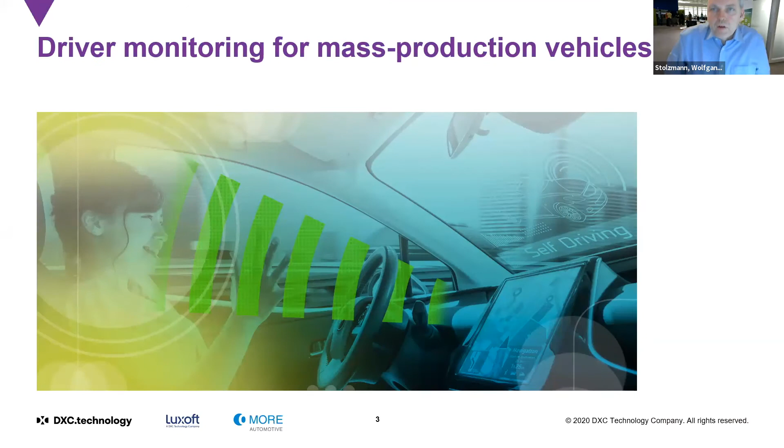Okay, let's start with driver monitoring systems for mass production vehicles, and as I announced, with the paradoxon that driver monitoring is an enabler for autonomous driving. I'm completely convinced that at least for the next 10 years, it can be assumed that a driver will still be needed to take over control in situations where a car is driving more or less autonomously, because if you imagine that we have one bad accident every 10 million kilometers, and if you drive with an average speed of 100 kilometers an hour, then you have one bad accident within 100,000 hours. And developing systems that can deal with probabilities of 1 out of 100,000 hours is very complicated.

And this is why we often think that we already have cars that are driving autonomously. They are driving themselves, but they cannot take over the responsibility for all seldom and strange situations. And with this, you need a driver who is able to take over responsibility in situations the system cannot deal with. We call this conditionally automated driving or level 3 automatization. And to ensure that the driver is not sleeping or completely out of the loop, we need a driver observation that ensures that the driver can take over the responsibility. And this must be done with driver monitoring systems, because driver behavior cannot be observed otherwise, because the driver is driving hands-free and the car is driving itself. So we need a driver camera.

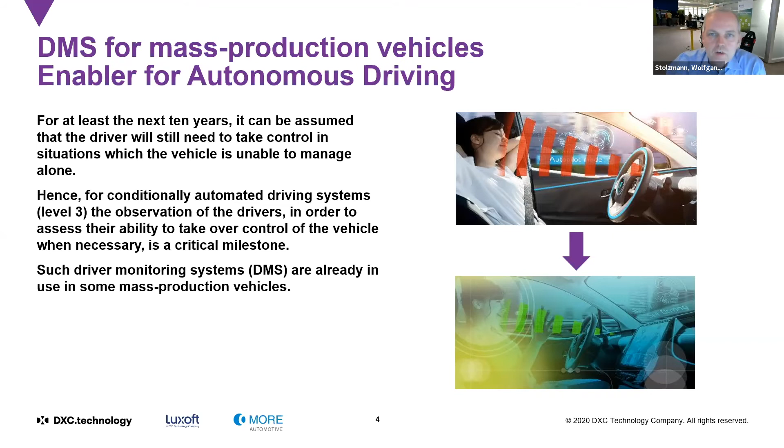So this was an enabler for mass production cars 5 to 10 years ago. But up to now, we have a lot of other interesting applications that can be seen for mass production cars in driver assistance systems and passive safety. We talk about drowsiness detection and automated driving, as said before, but also multi-level airbag deployment depending on the size of the driver and the known exact position of the driver's head are under development at the moment. But also in the area of user interaction, topics like driver identification, similar to identification with your smartphone, can be done with a driver camera.

Autostereoscopic displays that are now introduced with the new Mercedes S-Class need driver observation, and contact analog augmentation in head-up displays, as you can see here. Also, the first pictures of the brand new S-Class: when you want to augment a red line here on the street, you have to know the driver's head position, because if you move your head to the left and to the right, then this line will also start to move a little bit, and here you have to compensate this movement with the knowledge of the driver's head.

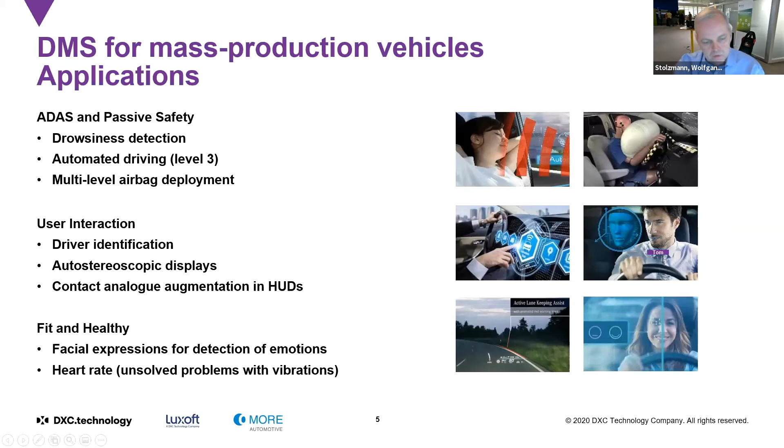With all these applications, you come up with the following signals. You need the so-called head pose that consists of a position and a direction. So we talk about a 6D head pose of the driver, XYZ for the head position, and yaw, pitch, and roll angle of the orientation of the driver's head. Then topics like gaze control or eyes on road detection need the driver's gaze.

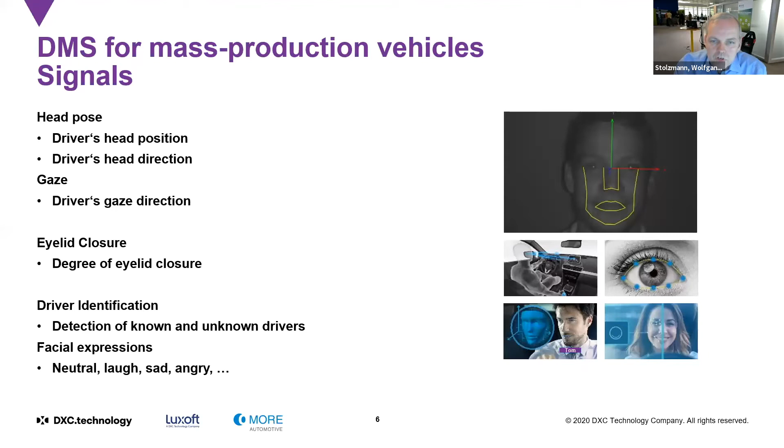For drowsiness detection, for instance, eyelid closure values are needed, so you need the degree of the eyelid closure or the eye opening, depending on how you define it. For driver identification, you must detect known and unknown drivers, and for facial expressions, you have to test neutral faces, laughing, sad or angry, or other faces to see whether facial expressions can be recognized.

One very important point for driver monitoring is what happened in the European Parliament and in the European New Car Assessment Program, so Euro NCAP, in the last years. For more than 5 years, it has been discussed that driver drowsiness and attention warning and distraction warning shall be implemented as a must in the European market.

And if you look to the legislative resolution of April 2019, it is said that the date for the prohibition of the registration of vehicles, as well as the placing on the market and entry technical units, was expected to be 2022. The latest information is that due to the corona epidemic, this is delayed to 2023. But after 2023, new cars need driver observation systems. And if you want to drive at least level 2 with these cars, it's mandatory to have driver monitoring systems. The next step is an advanced driver distraction warning.

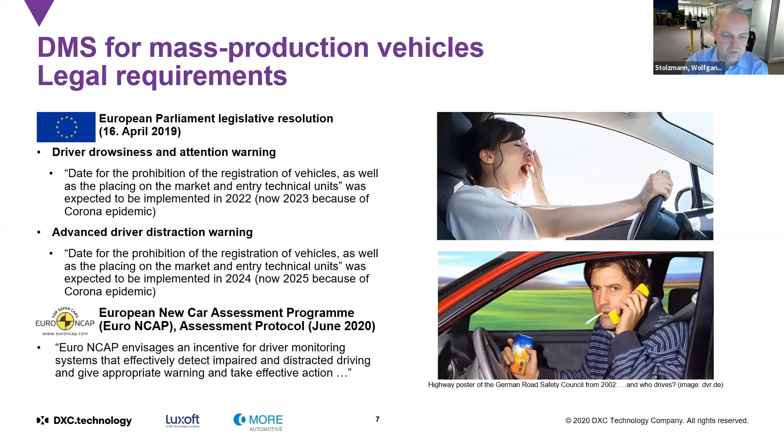At CMORE and now also at Luxoft, we offer a lot of possibilities for driver monitoring system validation, starting with consulting projects for OEMs, tier 1s, tier 2s, the setup of all ground truth systems, or the further development of new ground truth systems, the integration into test cars. This will not be my topic of today. Then data collection, data annotation, so labeling, and of course at the end the KPI analysis.

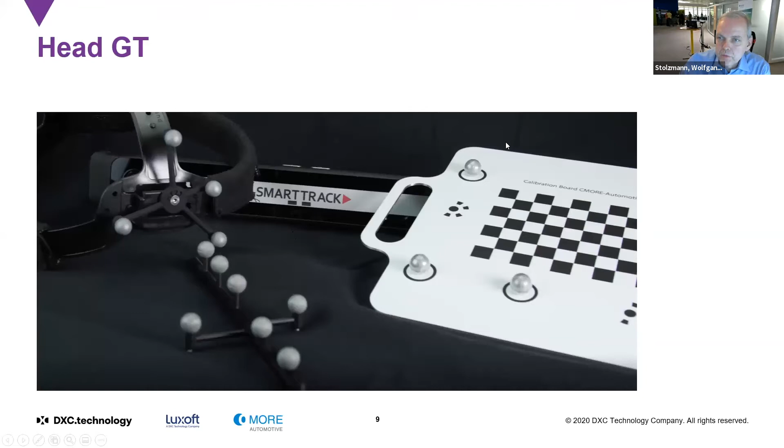Let's start with the online ground truth systems, and the first of it is our so-called HeadGT. It consists of a motion capturing system, a headband, and 2 calibration targets, as can be seen here in this picture.

Andre, you asked a question. I will go through this afterwards because it's not a question of understanding. If you have any questions for understanding, please, Julia, take a look at it and interrupt me. I will answer them directly, but general questions I think we can discuss at the end of the presentation. Yeah, sure. I'm checking. Great, thank you.

So our HeadGT consists of a motion capturing system. It's a one-box design with a stereo camera that is about 42 centimeters. It is mounted at the top side window of the passenger seat instead of the passenger assist handle. So here we can have a very robust connection to the body of the car to avoid any vibrations. And if a car has window airbags, they must be deactivated for the tests.

The frame rate with the old system is 60 frames per second. We are now able to deal with more than 100, 120 frames per second. But the driver cameras with the biggest frame rate up to now use 50 to 60 frames per second. So this is completely enough for the moment.

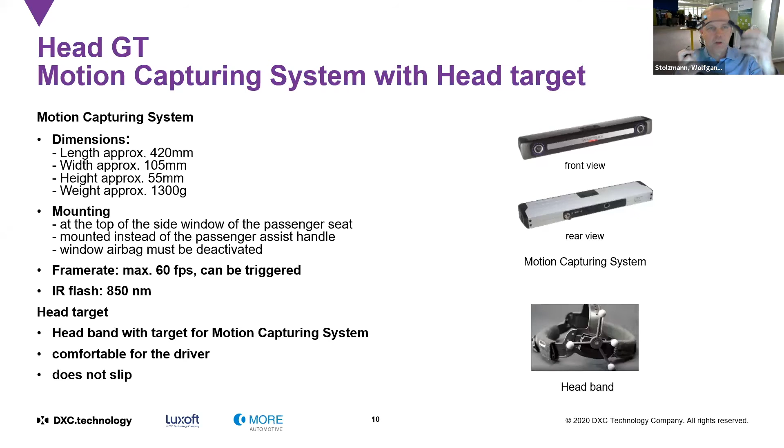The head target is a headband that contains IR reflective markers for the motion capturing system. It can be placed on the head of the driver, like a helmet for your bicycle. On the one hand, it's very comfortable, and on the other hand, it does not slip if you move around a lot. And I've worn this for 6 to 8 hours during a test drive. So this is really a good method to use as a ground truth system.

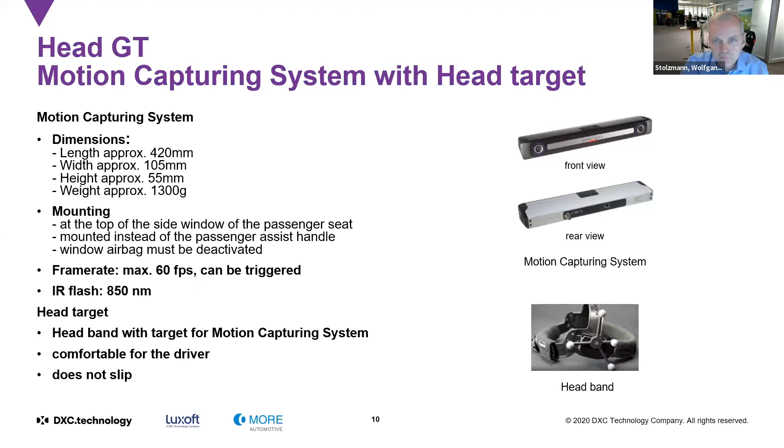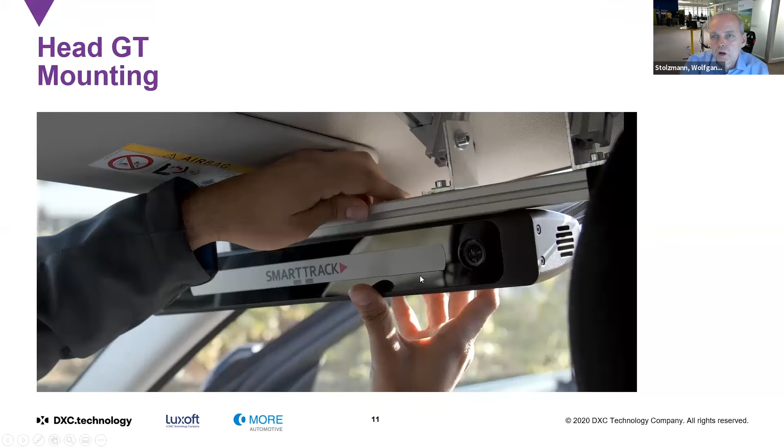Okay, this is the principle of how the head GT is working. On the one hand, we have the driver camera itself. It measures a head pose with a reference point somewhere in the face of the driver and an origin somewhere in the driver camera. So this green vector is the head pose of the driver camera. And our head GT measures the head pose with the origin of our head target. So it doesn't make sense to compare this vector with this vector if you're interested in accuracies of less than a centimeter. And with this, we need 2 calibration steps.

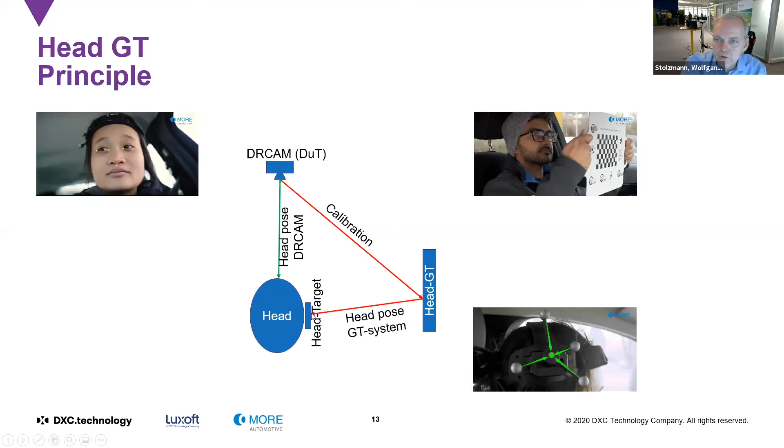The last step that is missing is to bring this reference point to the reference point of the driver camera. If we know how the driver camera calculates its origin, usually this is done by eye corners, and then a mid-eye point is calculated. We use this head calibration target. It has a tip, and the driver is asked to place this tip into the eye corners and to the subnasal or to the mouth corners, depending on how the driver camera is calculating its reference point. And if we have this, then we also know the coordinate transformation from the head GT target to the driver camera. And then the sum of these three vectors can be used as an exact reference for the head GT.

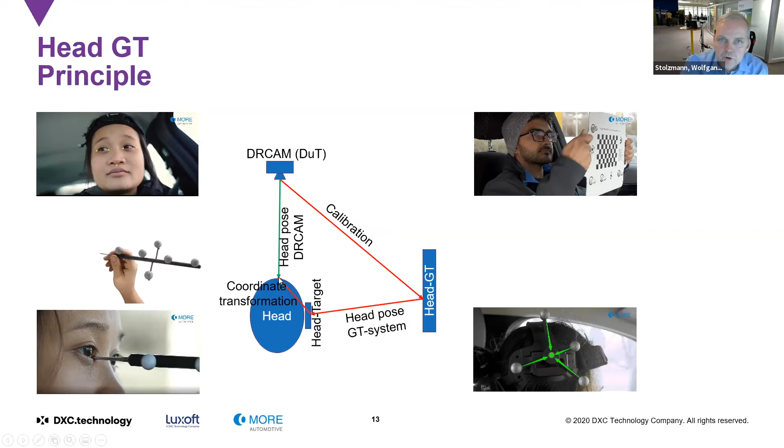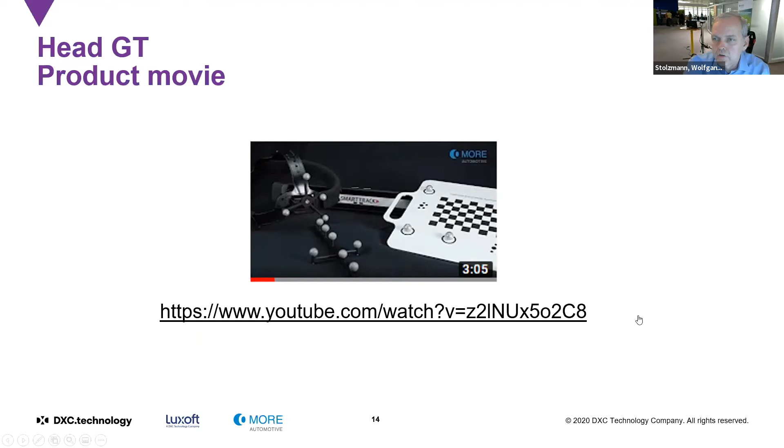If you are interested in a small video of about 3 minutes on how this head GT really works, there's a YouTube video available. You will receive the slides afterwards and can have a look at it if you like.

This is the last slide I'd like to show you on the head GT. What we do is, let's call it, a KPI pre-analysis. It is well known that if you make mistakes in the definition of the coordinate systems, big head movements in X direction also have influences in the other components. So in the first step we do some pre-tests where the driver is told to make head movements forward, backwards, to the left and the right, upwards and downwards, shaking and nodding and rolling the head. And then we look at the graphs to see whether this is reasonable. If you do not do this and start directly with statistical analysis, you might have strange results that only occur due to different definitions.

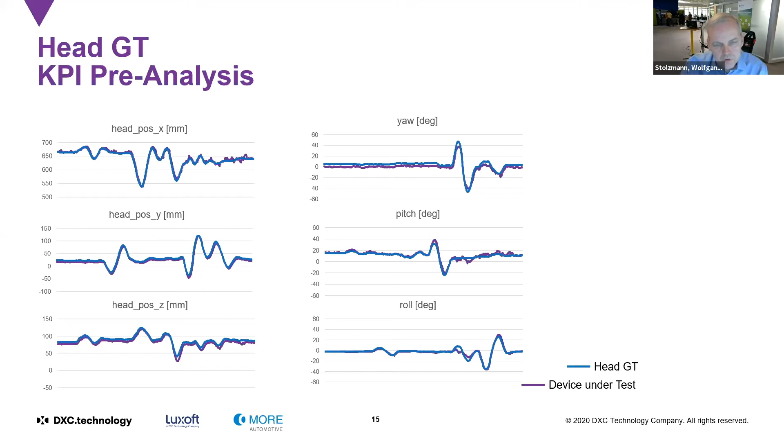And this is the principle. The driver is observing the blinking LED, and if the location of the LED is known, and if the position of the driver's pupil is known, then you can calculate the gaze vector, and the position of the pupil is approximated using our head GT. We calculate the gaze vector for the left eye and the right eye independently, because if you have targets that are nearby, these vectors are different.

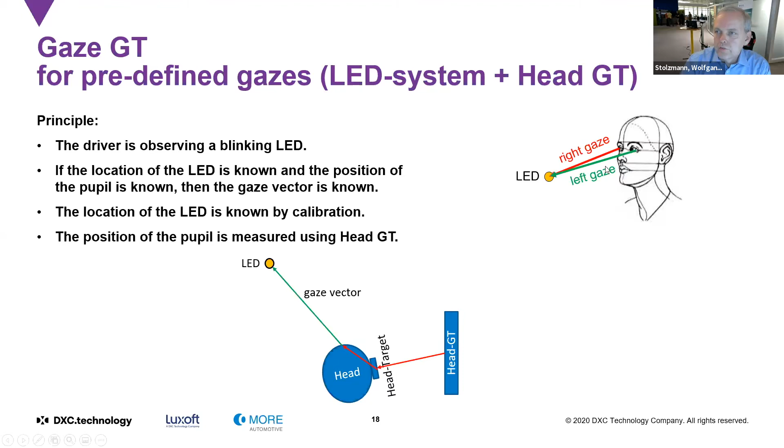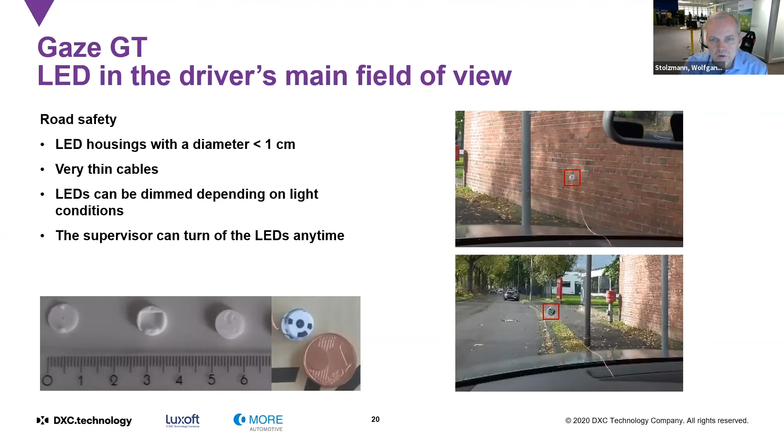Here are some pictures of the LEDs. We can use them during drives on public roads because the LED housing is smaller than 10 millimeters. We have very thin cables that cannot be seen by the driver. The LEDs can be dimmed depending on light conditions, and the supervisor and the driver both have the possibility to turn off the LED at any time. So if you are in a situation where the driver has to concentrate on the traffic, we interrupt the measurement, turn off the LEDs so that the driver is not distracted by this test.

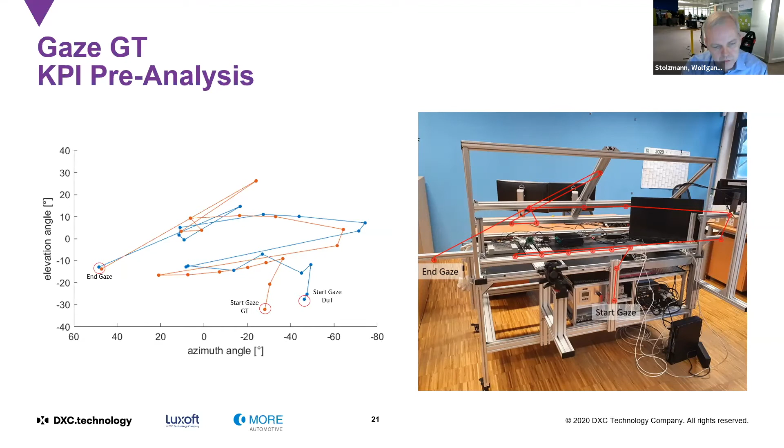If you're interested in the eye-opening degree, or the size of the pupil, or sometimes the OEMs are interested in measuring the diameter of the iris, it's still necessary to use eye labeling. There are some pre-developments for online ground truth systems, but the only online ground truth system for eye behavior must be a camera-based system, because if you work with any head-mounted device, the driver camera itself is disturbed by the ground truth system.

This is, of course, not allowed. And if you use other remote cameras, then similar algorithms in your ground truth systems are working as in the device under test itself. So I think it will take some more years to develop online ground truth systems. At the moment, we still need labeling here.

We offer 3 different kinds of labeling. With low accuracy, the upper and lower point of maximum opening of the upper eyelid and the lowest point of the lower eyelid are marked, and then the distance is measured. A little higher accuracy can be reached if you first mark the eye corners, then give the labeler a bounding box that is parallel to the line from the left to the right eye corner.

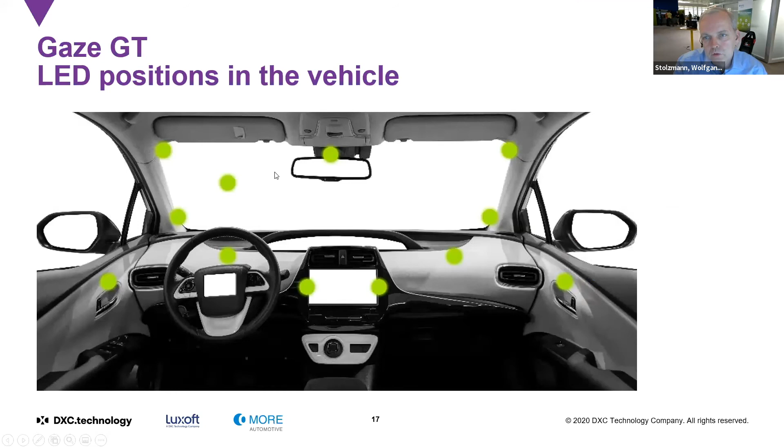Next question: you mentioned systems should be connected to the car wiring, like CAN or Ethernet. What about the legal part of using this system on public roads in Europe? As far as I know, some people claim it's illegal to use any modified cars in Europe, but of course it's not. By the way, when I talked about Ethernet, I mean automotive Ethernet, referring to the slide with CAN and Ethernet.

CAN is quite easy because you can listen to a CAN bus without making any changes to the signal, and this is also possible in our own cars. For Ethernet, we very often need the help of the OEM, who has special allowances in Europe, but also in the US and Asia, to drive around with these cars. Then we receive a document confirming that the changes to the car are not relevant to any functionality of any assistance system. The question is very good: you cannot make changes in the CAN and then have an emergency brake trigger because of an error. This must be avoided, and here we very often need the help of the OEMs.

Next question about safety: when would the driver be warned about a scenario that an autonomous car cannot handle? The time frame is very short, and probably it should be short. The numbers here are still varying a little bit, but the first thing you need to know is that for a level 3 vehicle, it must guarantee that for the next couple of seconds it is still able to handle the situation. This time is very often assumed to be about 10 seconds. So the car must be able to recognize situations 10 seconds in the future, and then the driver has to be informed to take over responsibility. With this, you also have the same 10 seconds to check that the driver is still awake.